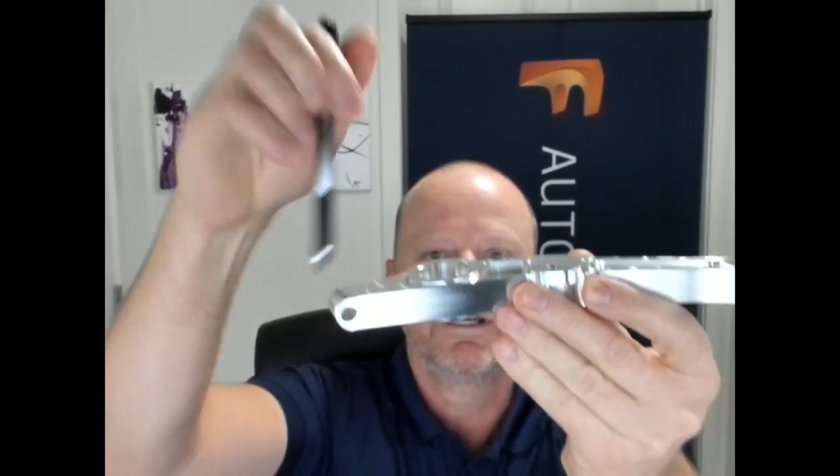So again, like I said, you expose this hole and all of the work on this side is done and this hole is done. So all of this stuff is perfectly in the right spot, very accurate. And then when you flip it, this hole is still there, and all of these features we want to be relative to this.

So what I did is I drew - let me back up a second. So what we can do is in midstream we can come in there, probe it, and carry on and make sure that everything is right. So what we're going to do today, I'm going to show you guys how to do that.

So let me switch screens here. And because I rebooted, I lost whatever files I had open, so let me switch screen. And let me hide that component color toggling there. Okay, so let's turn that on.

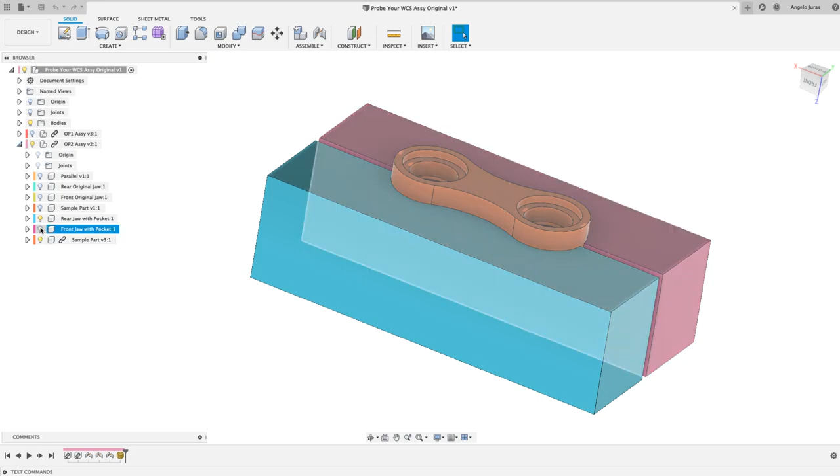So if you remember on the last live stream I did some soft jaws, and this is a similar part. Let me hide some of these jaws here. So this is a perfect scenario where we could use that strategy.

So let's say if you have this feature here and it's a counter bore and it's very accurate, and on the other side you also have that same counter bore. Well, how do you machine that if you were to flip it and guarantee that it's concentric? So this could be like a link, and what if there's a bearing in there or a bushing of some sort?

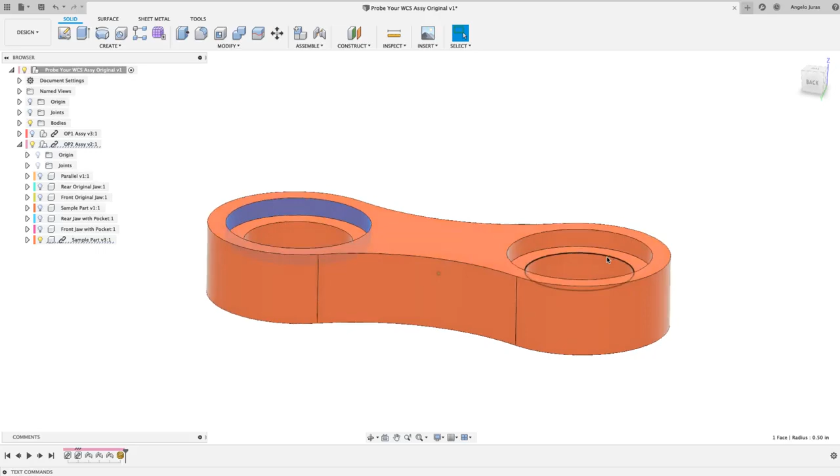So one strategy we use is we can come and machine everything and obviously do the first operation, and then when we flip it over, we would machine off the material off of this face, and it would expose this through hole that was done from the bottom. And then we can probe this feature here, probe this feature, and carry on and make sure that bore is concentric to this bore.

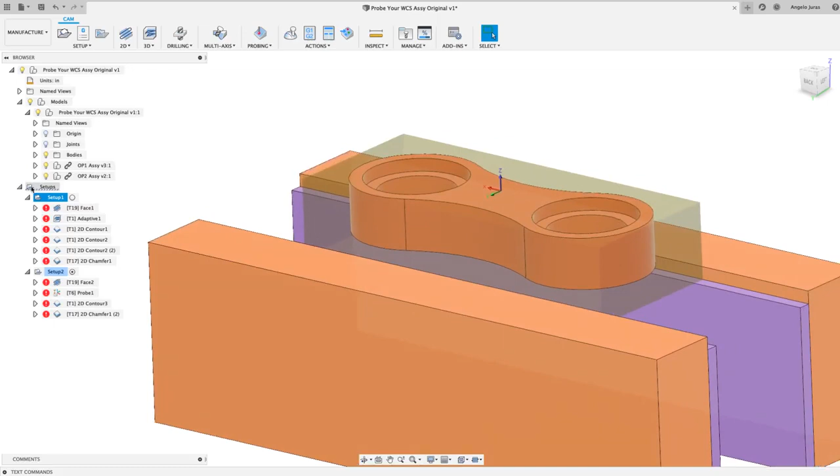So I did, if we come in here to manufacture, I did a little workflow here. And let me come in here and just kind of make things visible. So we've got our operation 1, and we've got our steel jaws - these are some parallels, steel jaws in our vise. And we've got our stock, so there's the stock you can kind of see in that highlighted preview. And then let me generate all of this.

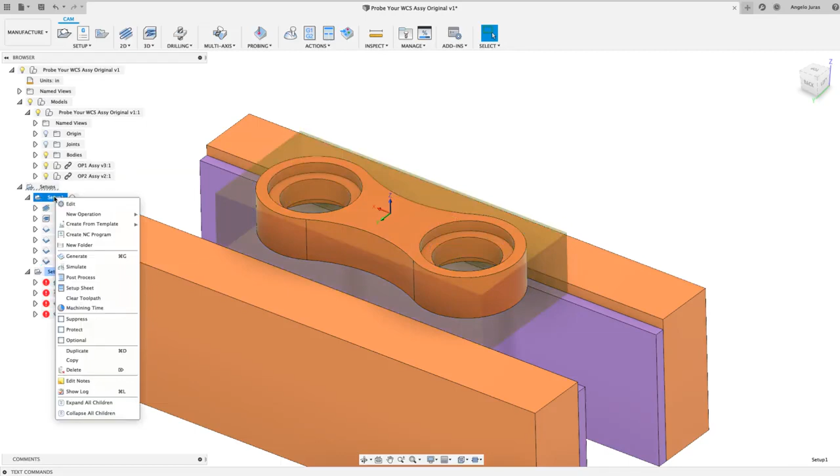We face that, we do some adaptive to clear that material, do a finish contour on the outside, finish contour of that inner bore, and then also these counterbores, and then chamfer to deburr everything. And then what you're left with, we can simulate this now. Let me show the stock, and I'm going to make this just material for now. And on the mode, I like to show tail. Let's simulate that.

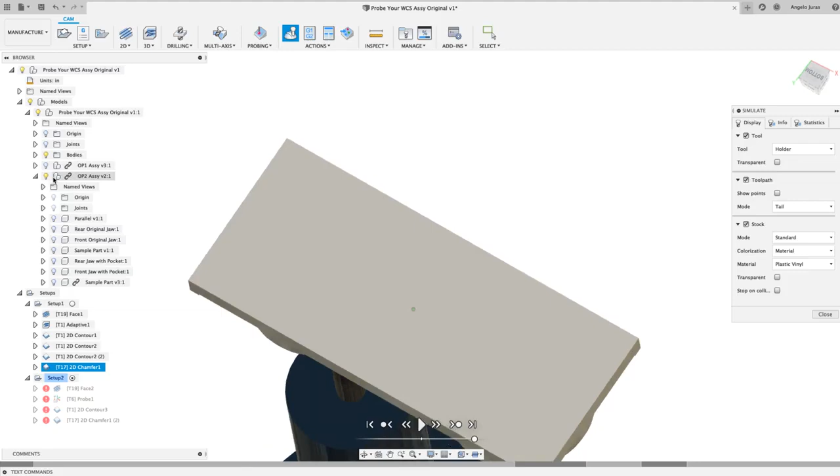We could even hide the part so we can see just the stock. So then there's our part, and then we've got this counterbore there and a through hole. So how do we ensure that when we flip it over, and let me hide this assembly and show these guys here. So when you're holding it this way and you machine this off the top, how do you ensure that those counterbores are going to be in the right spot?

So that's what we're going to do today. I'm going to show you guys one workflow. It is not the only workflow that you can do in Fusion. There's many ways to get from point A to point B, and this is just one of many ways to get there. So we're going to do that right now. I'm going to switch over to the new design.

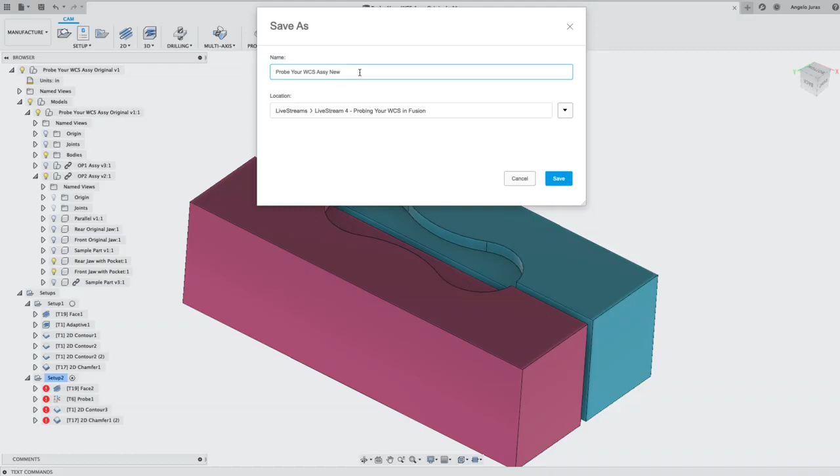So now we've got a brand new part, and what I'm going to do here is delete. So let me clean this up a little bit so we're looking at a clean slate. So I'm going to delete that setup. I'm going to delete this setup. And what we want to show is the first operation and the part. So we're not going to get into how I did all these assemblies. That's going to be in a future live stream. Kind of covered that last week, on the last live stream I did on creating the soft jaws.

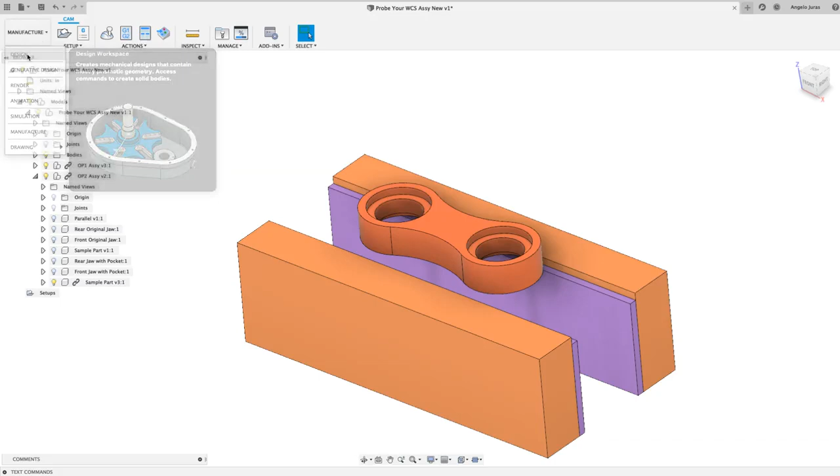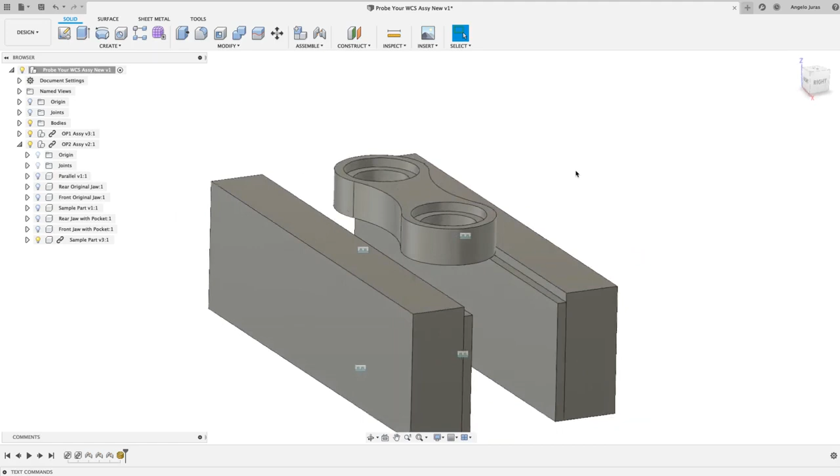So let me go here to design, and of course, because I showed things here and hid things and unhid things, it all depends on if you're in the manufacture workspace or the design workspace. We can turn off this just so you get an idea, but I'm going to leave it on so you guys can distinguish easily what is what. So this is going to be our part, and then these are jaws, and then these are parallels where the stock sits on. And I've got the stock right there. And the stock is transparent. So let's go ahead and start creating some toolpath and show you guys how we did that.

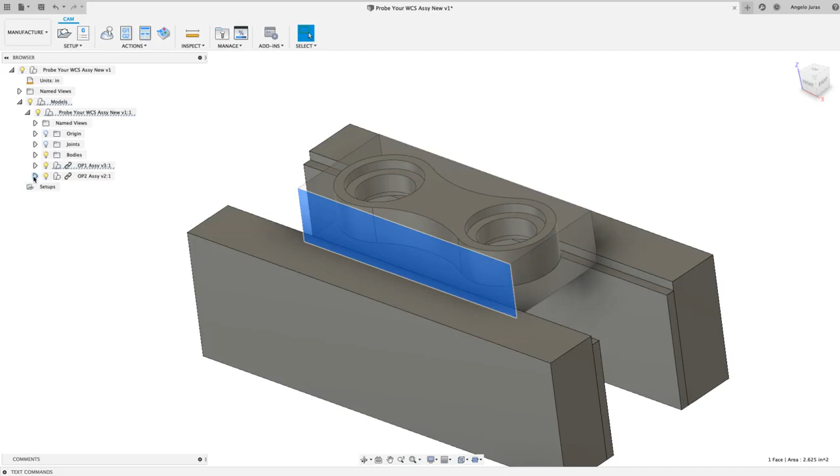All right, so if you remember, we come in here in Fusion in the top left where we have design. We want to come in here under manufacture. And the manufacture workspace is where we do all of our machining. There's also other goodies we can do in there, but I'm just going to do the machining for now. So again, like I said, we've got our jaws and we've got our stock. This is our stock and our part in there. So let's go ahead and create a setup. And in the setup, what we want to do is define our workpiece, define the stock, define the origin.

And as you can see, when I did a setup, Fusion automatically recognized everything in my assembly and threw some stock around there. But one easy way I can get around that is just here, go under model. And model is what are you cutting? What are you machining? So I can come in here and I can press, click, and hold to pick through that stock. And I'm going to pick that. So again, I'm going to X out of that. And we've got all of this here. There's that stock, that rectangular stock. How do I pick through that? You click and you hold. And then as you move and hover your mouse, it's going to start picking up things that were behind the cursor of your mouse. So that's my part that I want to machine. So I'm going to do that and click that.

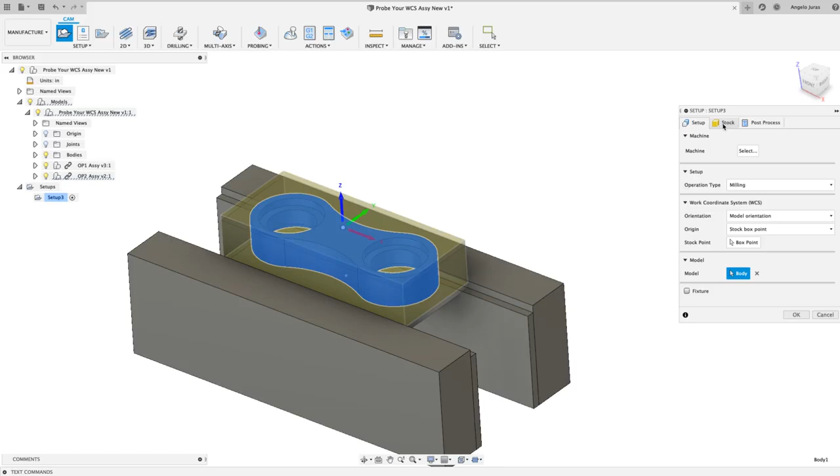The next thing, I'm going to jump over here to the stock. And by default, Fusion's doing a relative size box, which is leaving 40 thousandths of an inch on the sides, 40 thousandths on the top. I'm just going to come into here, and because I modeled my stock, I'm going to go here from solid.

And now I need to select the stock. So where is that? That is my Op1 assembly, and there's my stock. So now you can see Fusion is identifying the stock that we'll be machining away to create this part. Again, if I cancel out of that, I come in here into my browser and I just navigate to the Op1 assembly and I have my stock in there.

And I hit OK. Oh, actually, let me come back here. I want to touch on a few things here. Here, under the origin, this is where you set in your 0. So you can do model box point, or you can do stock box point. And what that does, it projects like a rectangle, and it creates these dots at the end points and at the midpoint of all of these entities.

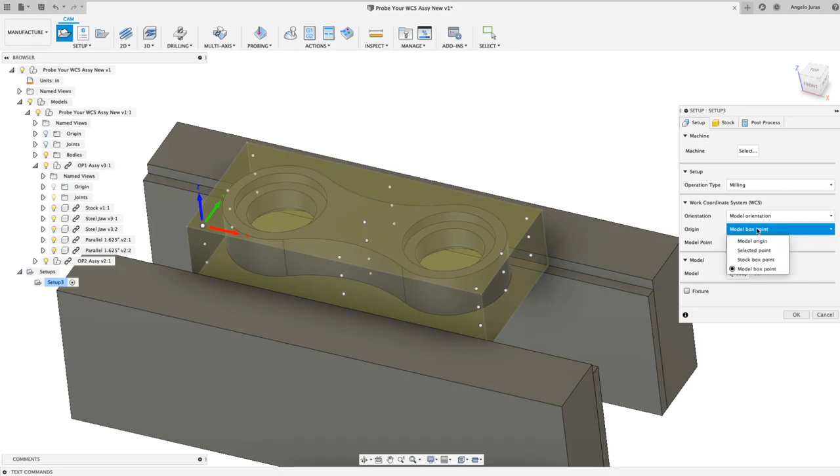So you can say you want your X0, Y0, Z0 here on this corner. You can pick this corner. This is of the stock. And again, like I said, you can also do of the model. And I'm not going to choose model because I am going to pick off the stock. So I'm going to do stock box point, and I'm going to pick the center. And the reason why I'm picking center is I'm going to be able to probe this and pick that stock.

And I'm going to hit Z, the Z face, to come down with my probe here and hit the top of that. And if you guys don't know what a probe is, let me minimize this, and I can drag something into this screen. So earlier I was showing that part that I made last week at Haas. We did a Train the Nation tour, Machine Like a Pro. We made this part. So there's a probe in the machine spindle, and these are the parts.

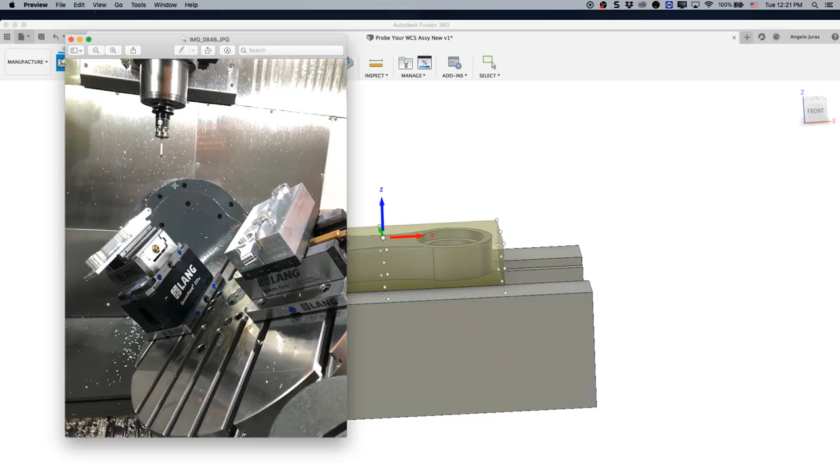This is a 5-axis machine. The table is obviously tilted and rotated. But that is a probe, and that's a Ruby stylus. And this stylus is very similar to CMM. So this stylus has radial deflection and axial deflection. So the machine spindle will come down and make contact with the part and take some measurements, and you can set your work offset. You can measure the bore diameter. You can measure feature to feature. There's all kinds of cool things you can do with the probe. So that's what it is. That's a spindle probe.

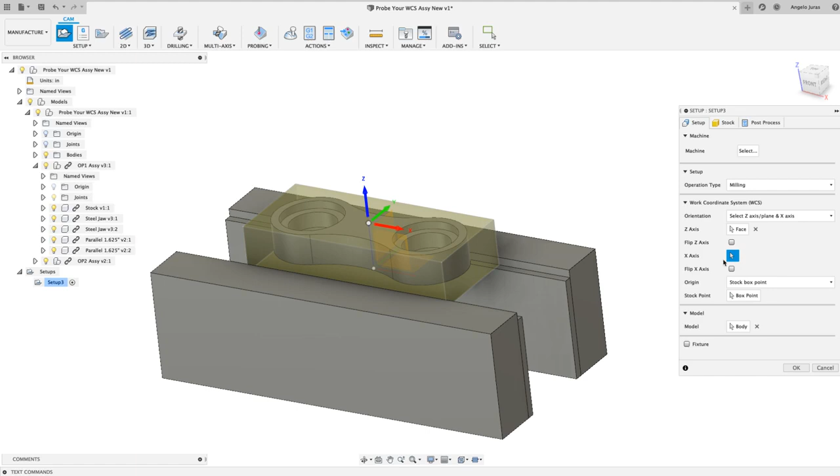All right, coming back over here. So just going back through here, making sure everything is set right. On my orientation, I like to do Z and X depending on what I'm doing. And in this case, that's exactly what I'm going to do. So I'm going to set Z normal to that. It's already there, but I'm going to show you how I do that. So Z is this face. And then once I select that face, Fusion jumps over to X and is requesting some information. What is the x-axis normal to? So I'm going to say that face. And nothing really changed because the model was already in the right orientation.

But if it wasn't, like you see this view cube over here where the Z and X are, sometimes when you have a large assembly or if the model was imported or brought in a different orientation. So this is where you set your orientation of your WCS, work coordinate system. So everything looks good here, guys. I got that set. I've got my body, and again, I've got my stock, post-process. I'm just going to tell it program number 1, and I'll just do op1 live stream.

And we've got another feature up here called NC program. We're not going to have time to get into that, so I'm just going to keep it simple here. And like I've talked about in previous live streams, we've got your WCS offset. Your machine can have different offsets, so you can do 1, 2, 3. So 1 would be G54, 0 is also G54, 2 would be G55, and so on. Okay, so that all looks good. I'm going to hit OK.

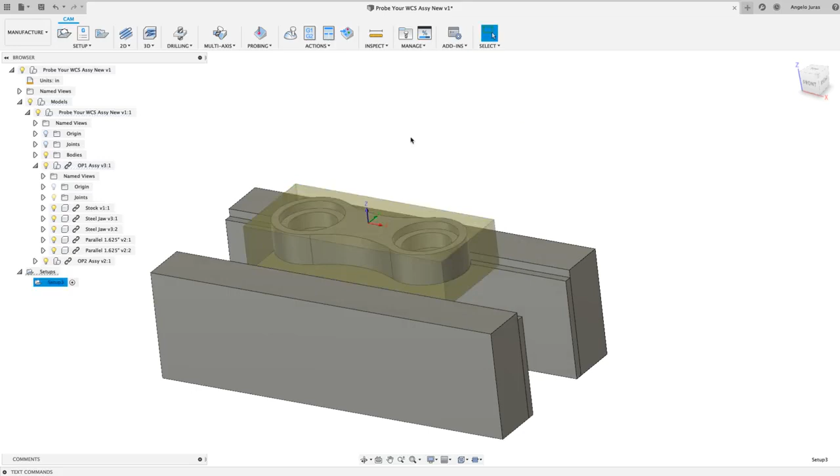And now we've defined, let me close some of this just to clean up my screen a bit. So now what we've done, we've defined our stock, the origin of the stock, and we've defined our model. One thing I could have done in this setup is defined the jaws. Actually, I'm going to do that. Here under fixture, I can just click this, this, and that parallel. So when I do the simulation, it's going to show that in the simulation. It'll give you a nice representation of what we're doing. So I'll hit OK.

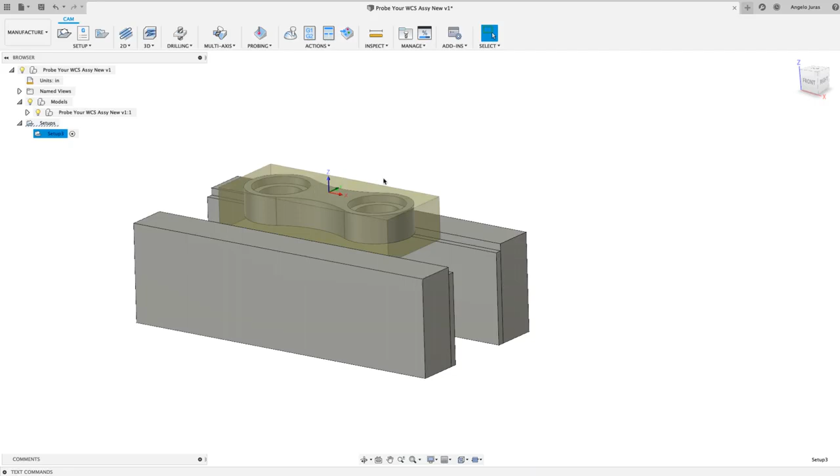Very first thing I want to do is I want to face the top of the stock. So we've got our 2D toolpaths here. I'm going to select face. Very first thing we want to do, we've got all these tabs over here. We need to select the tool. What tool are we going to face with? So I can come down here. I've got all these sample libraries. I'm going to come down to this one, inch aluminum, and I can sort by type. I'm going to look for face mill and hit OK.

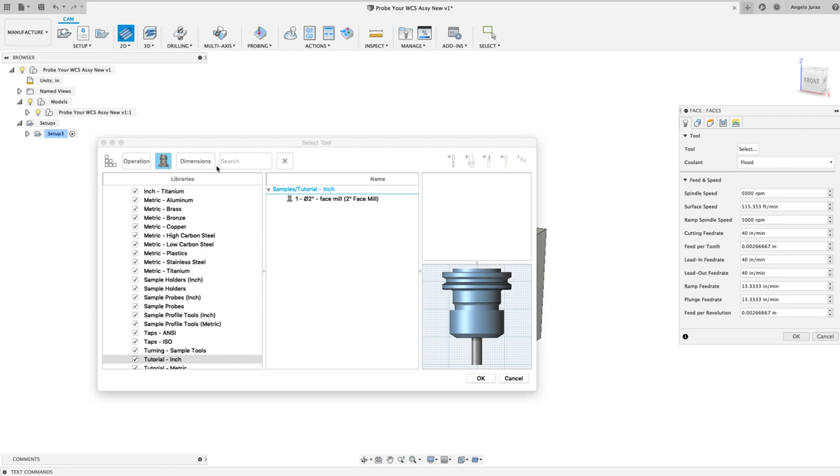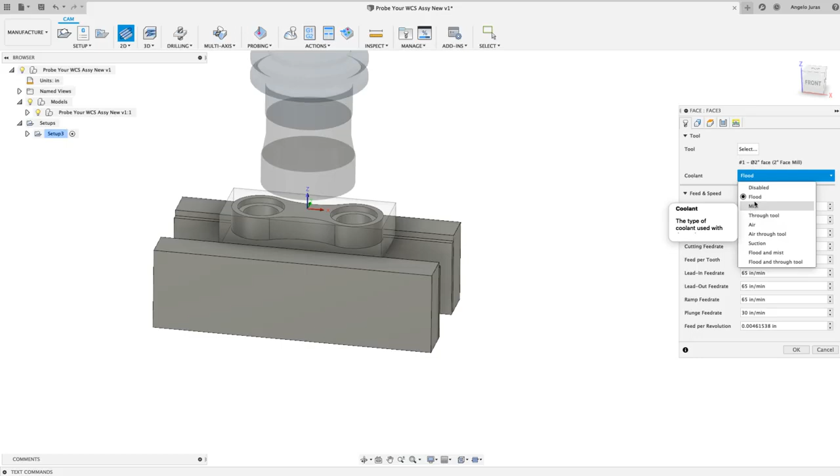And looks like I don't have anything in there, but I know I have one down in here. And as soon as I click that, I'm filtering by the face mill. And yes, I do have a 2-inch face mill. There's a preview of my tool, and I'm going to hit OK. So Fusion brings in the preview of the tool. Speeds and feeds are brought in from the tool. You can adjust those here. If you want to adjust your coolant, you've got all these options here on the first tab under Tool.

The next tab is Geometry, like what are you cutting? And I didn't select anything, but Fusion automatically detected this yellow rectangle, and that is the stock that we defined in our setup over here. So Fusion's intelligent. It already knows where the stock is, and in the setup, if you remember, we defined that model body. So I don't really have to do anything there, and by default, everything is correct here also.

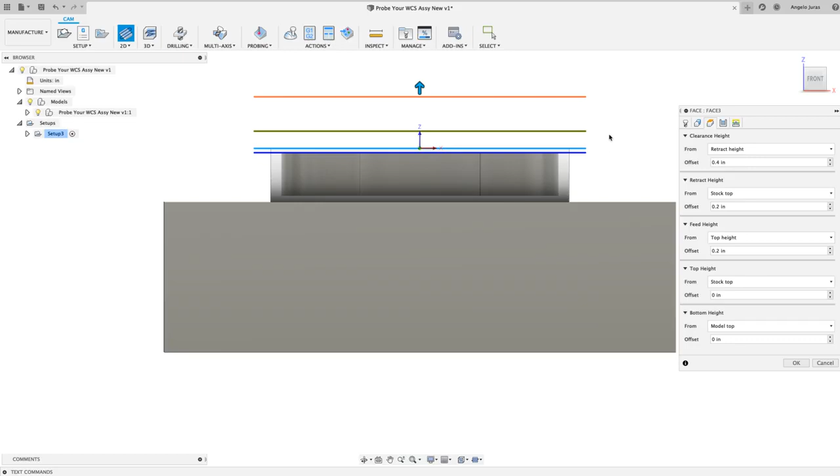If I look at it from the front, it says the bottom height is the model top, which is that dark blue line, the top of the model. The top height is the stock top, which is that light blue color. And then the retract and clearance, that's where the tool is rapiding to and positioning, and if it's moving around, where it's retracting to in Z. So all you really need to do is select the facing operation, select your tool, and hit OK. So Fusion's going to come in and machine that face.

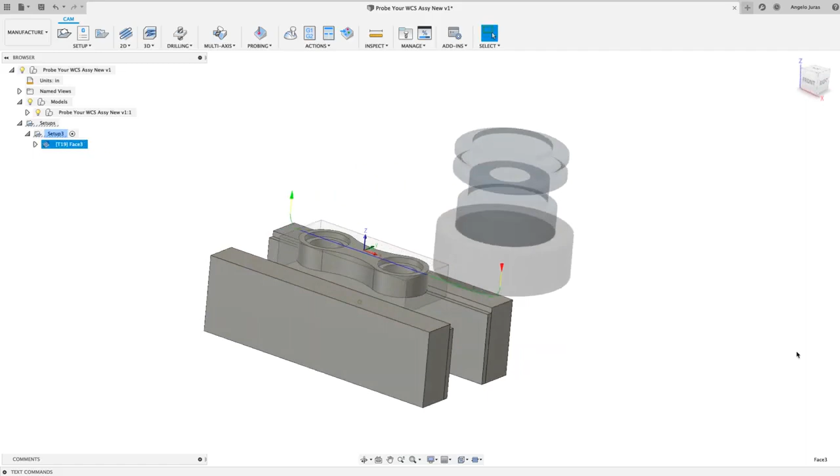I'm not crazy about how that looked there, so let's do this. Let's select a different tool. I'm gonna come into my tool. I've got a 3-inch face mill. Let's do this one and watch what it does now. It's just gonna come in right down the center. I like that. That looks good. And we're only taking 50 thousandths off the top, so we can do that in one shot.

If you want to do that in multiple passes, you would right-click your operation, and under passes, you would do multiple depths. So this is your maximum step down. I can say take 100 thousandths of an inch maximum, and then for the finishing, take 0.005. I can even slow down the feed rate to something like 50 inches per minute, and hit OK. So if I zoom in, you could see now it's taken 2 passes. So there's that first pass, 5 thousandths above, and then the second pass.

All right, let me take a look here at the comments, see if there's any questions or anything. Looks like Aaron's covering that well. Maybe we could talk about G-code sometime. I'd love to talk about G-code sometime, Ron. And Ice Creams 62. Hey, whoever won the bottle openers, did you guys receive those in the mail? All right. They did, yes. Aaron says they did. Awesome. Cool, guys.

All right. And one thing on that bottle opener, let me switch over here. I thought I had one here. It's very narrow. So when you're trying to open the lip, it's peeling it, whereas a traditional bottle opener is a lot wider, so it grabs around a larger radius. So when it lifts up, it does it in one shot. Ours was narrow because of the spark plug, so you have to get it in a couple of bites, but it works very well. We've tried it.

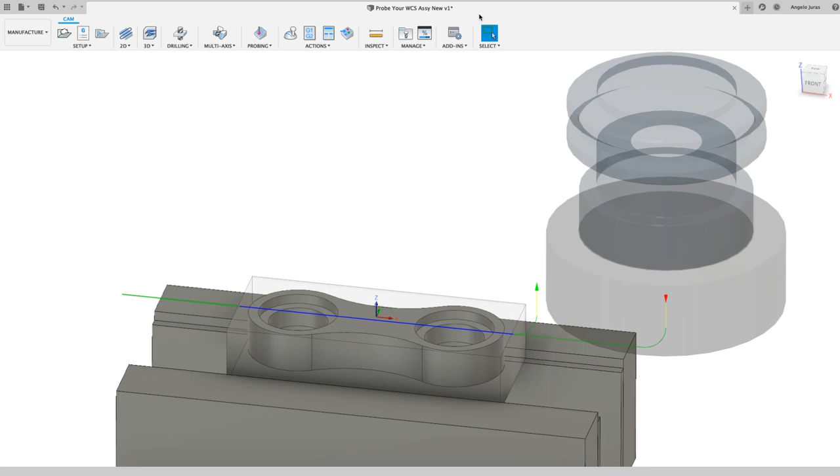All right, so moving right along, we've got that face. We need to machine around the outside and rough those bores out. A few ways to do that. I'm just going to come in here under 3D, Adaptive Clearing. I'm going to select a tool, and I have this 3/8 of an inch flat end mill, and I'm going to hit OK here. I'm going to select that, and then we don't need rest machining turned on.

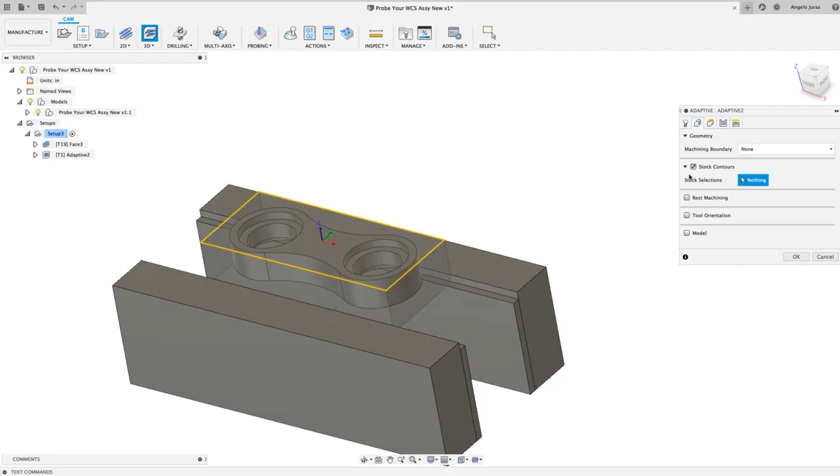Stock contours though, remember what I just said earlier for the facing? Fusion recognizes where the stock is, so if you had larger stock, it would put that yellow rectangle around a lot larger boundary, and it would know where the stock boundary is. Under heights, the default here is model bottom. I'm going to do something different. I'm going to say take the tool down to the top of that jaw, but raise it up. Let's do 50 thousandths above that.

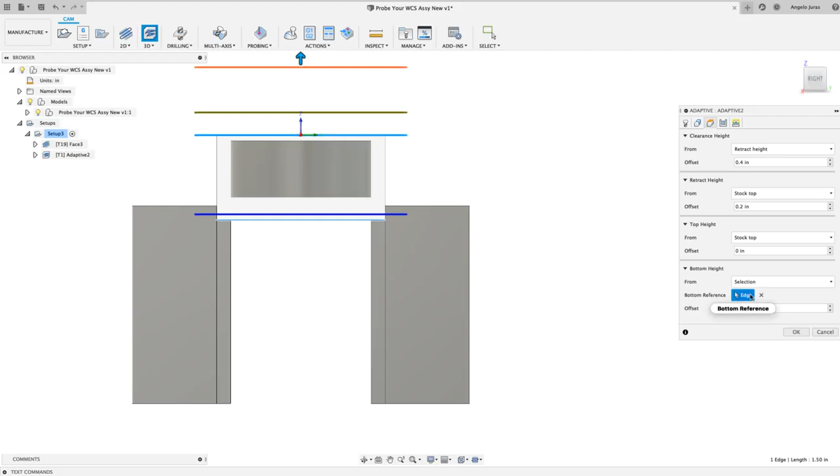Let me come here and let's see. Will that work? Yeah, let me rotate around to this side view. So this is the jaw, and these are the parallels. This is the stock. Oh, I still have this selected, so every time I'm clicking, it's selecting things. So let's cancel that out, and I want to make sure that I select that face, view it from this side, and my tool will go to this dark blue line, so it will be 50 thousandths above the jaw. So my tool will go right to there. That looks good. I like that.

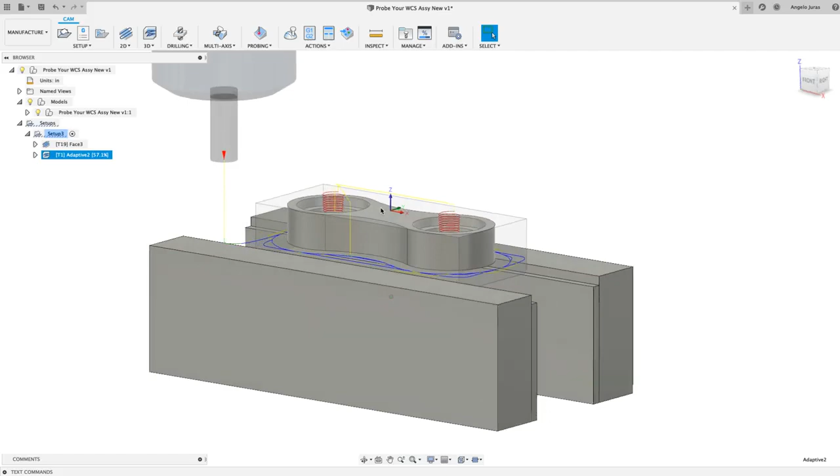And then stock to leave, we want to turn that on. I want to leave 20 thousandths on all the walls radially, and 20 thousandths on all the floors axially. I'll OK that. And Fusion will now rough out the outside and rough the inside, because I told it stock to leave. So that looks good so far. Let me do a quick simulation. I'm going to right click here, go to simulate, just so you guys can see where we're at.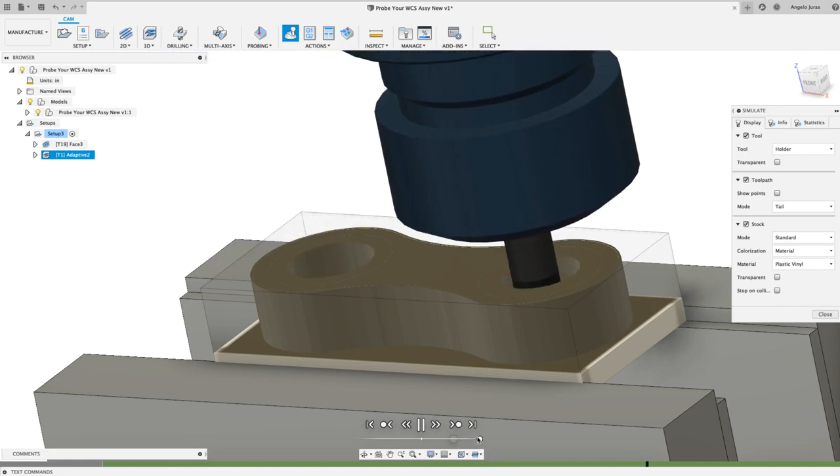And there's that finish pass, and then roughing around the outside. That looks good. And there it's entering the hole. Speed this up a little bit more. All right. Left a little bit more material there than I was hoping, but I can make some adjustments in the passes tab. I can come to that in a moment.

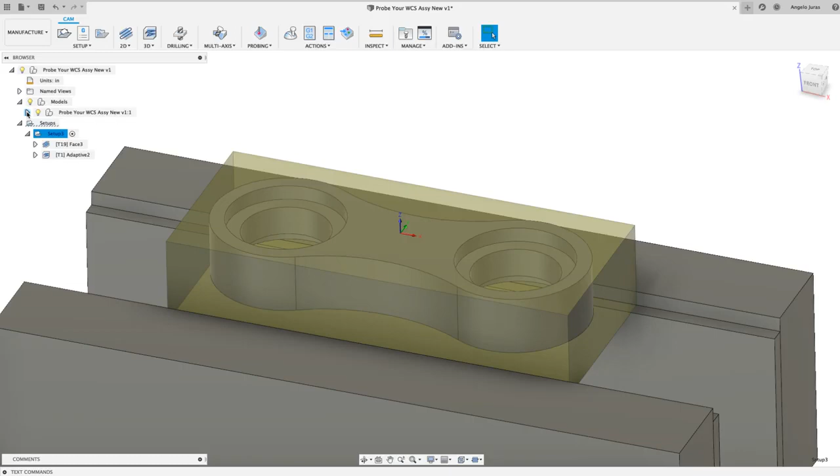What I'm going to do next, guys, we want to finish around the outside of that. Let me come into here under 2D contour. And I'm just going to select this edge. And under the heights, remember what we did previously? By default, Fusion is going to the selected contour, which is that bottom edge there. I'm going to go to selection again and say go to the top of that jaw, but stay 50 thousandths above that. And there we got a toolpath. And we cut around the outside. That looks good.

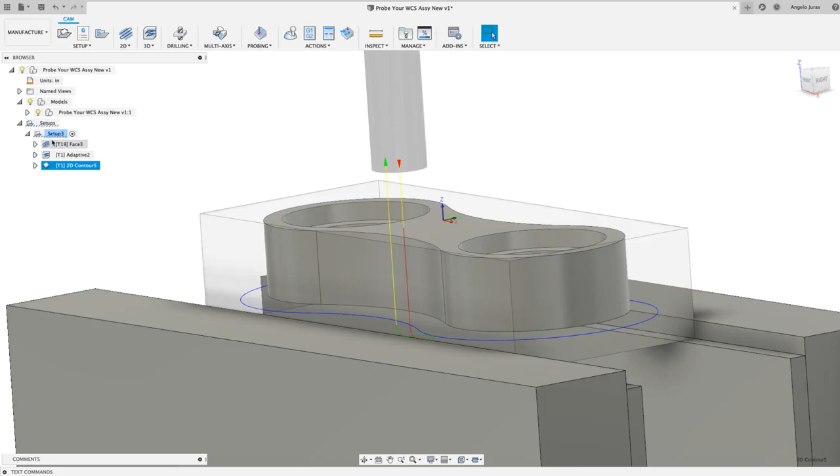Let me take a quick look at the comments. "How can I set up a manual work position for the stock? I want to nail the stock to an MDF board and use a work coordinate 0, 0 on the MDF position." Duke Dynamics, are you talking about here? This WCS? Oh, looks like Aaron answered it already. "Are you modeling all this in Fusion?" Yeah, looks like Aaron got it. Okay. I'll stay on track, guys.

Cancel that. So now I need to finish this inner bore. Let me turn that stock off, just so it's not there when I click and hover over. So now we want to finish this inner bore and this wall, and we'll also finish that floor. And remember I said on the adaptive it left a little much on the fine step down. So I can do flat area detection, and let's hit OK.

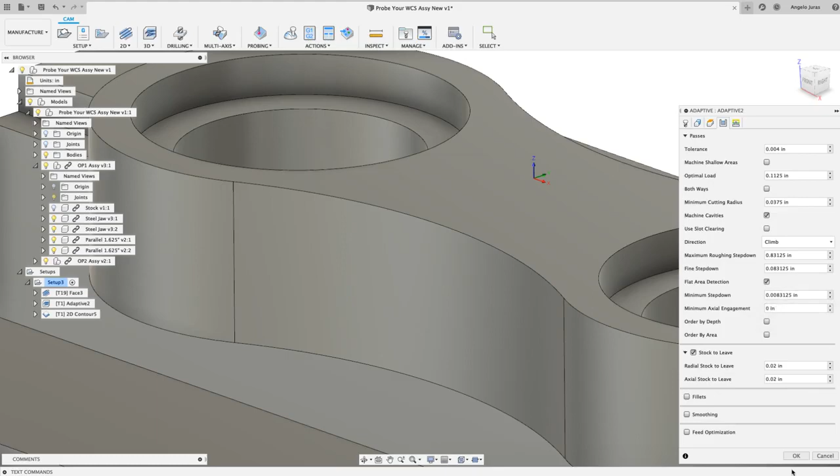And so yeah, oh, we're machining over. Actually, I don't want to do that, guys, because we already faced it. So we'll turn that guy, and then the fine step down, let's do something like this. 30 thousandths, and that's actually more like a step up. And that should get us a little closer to that bottom face.

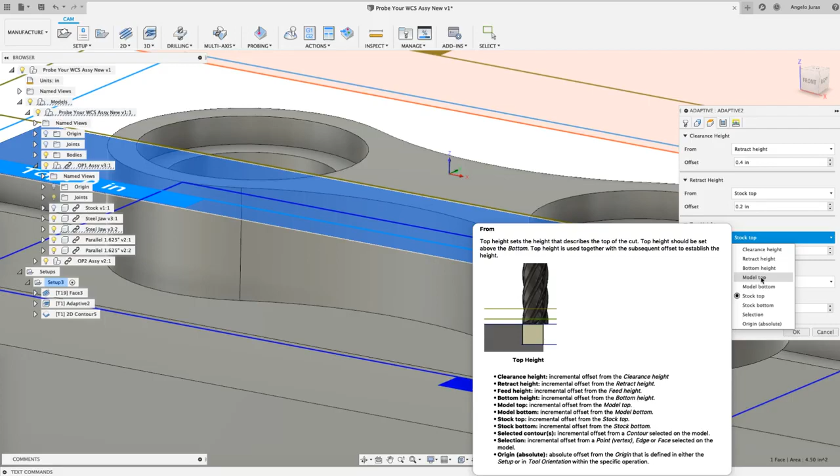And over here, one thing here, stock top. I need to change that to model top. That was the default behavior, going to stock top. I want to go to model top, and it's already been machined. It's already been faced. So Fusion was looking at the stock top, and there was 50 thousandths of material to remove. That's why it was doing that. So now I changed that to model top with an offset of 0. Now we won't be wasting time cutting that top face. There we go.

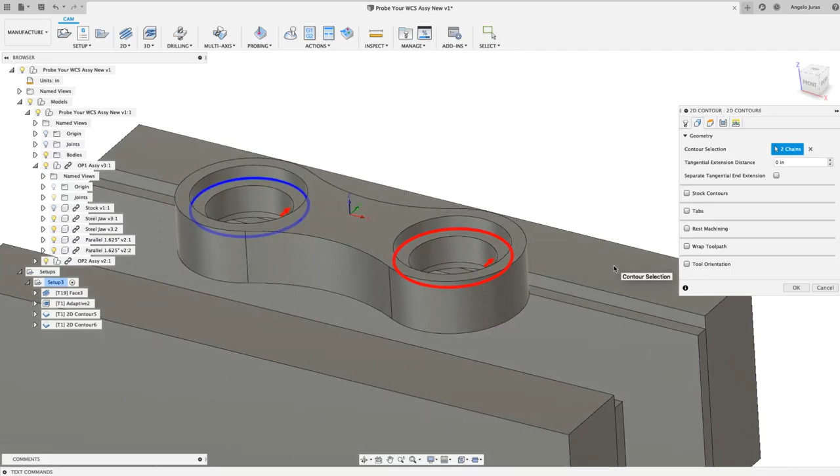Okay, so now we faced it, we roughed the outside, and we do a contour finish on the outside. Now we want to finish these inner bores. I can use that same 2D contour operation. I'll come into here, 2D contour. I'll hit this one, and this one. We'll hit those bores. Actually, I'm going to change the order of that. I want to hit this bore on the inside and this bore on the inside. I'm going to do that first.

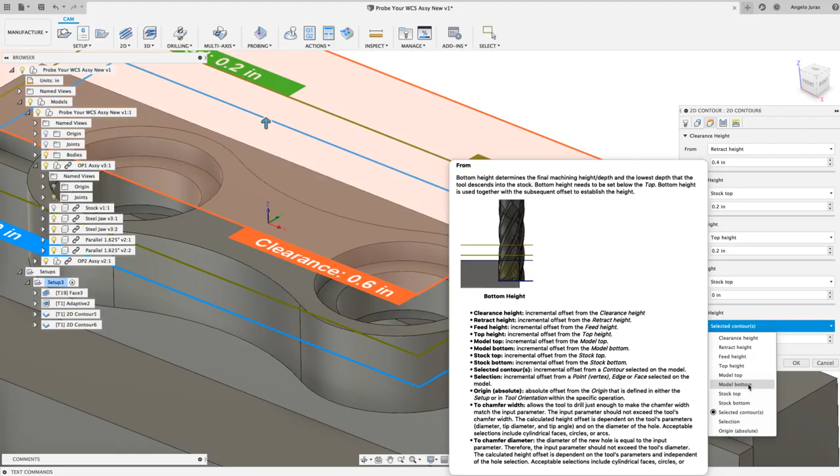And on the heights tab, instead of going to the selected contour, which I selected that bottom edge, I'm going to go to the model bottom and go beyond the bottom by 30 thousandths. So now when I look at this view here, it's going to go to that dark blue line. If I were to go to selected contour, the dark blue line is up inside here, right there. But I don't want it. I want it to go to the model bottom so that when I reach from the other side with my probe, I can hit that. All right, so I'm going to go model bottom.

I'm going to verify stock to leave is off. There's some things I can turn on here. I can do wear compensation. That's for cutter compensation to determine if there's any wear on your tool, so you can adjust the size of that bore properly. So you can turn that on. I'm going to hit OK. And now we're machining that inner bore there, this wall, and this wall.

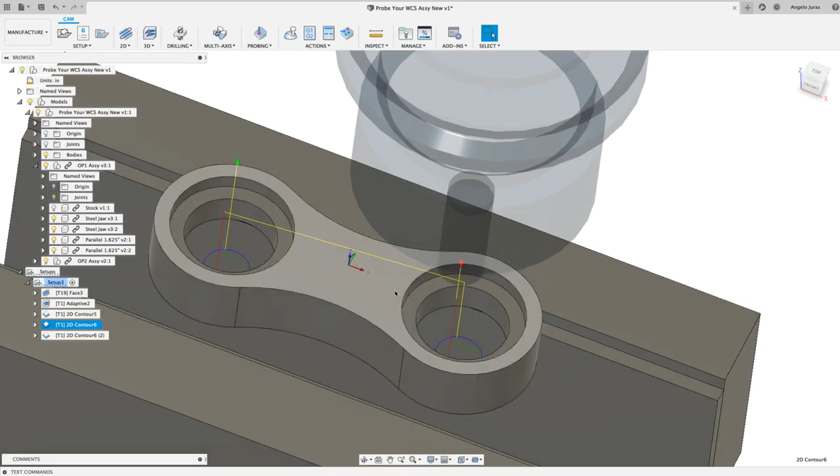So next I want to hit this wall and this floor. One thing I can do, I could duplicate that. And now I got an exact duplicate of that prior one, and I can edit. And here under geometry, I will reselect the chains to here and here. And on the heights, if you remember previously, oops, clicked wrong, I was going to the model bottom. Now I do want to go to selected contour with an offset of 0. So I want to go with my tool to that face, to that depth, cutting that wall.

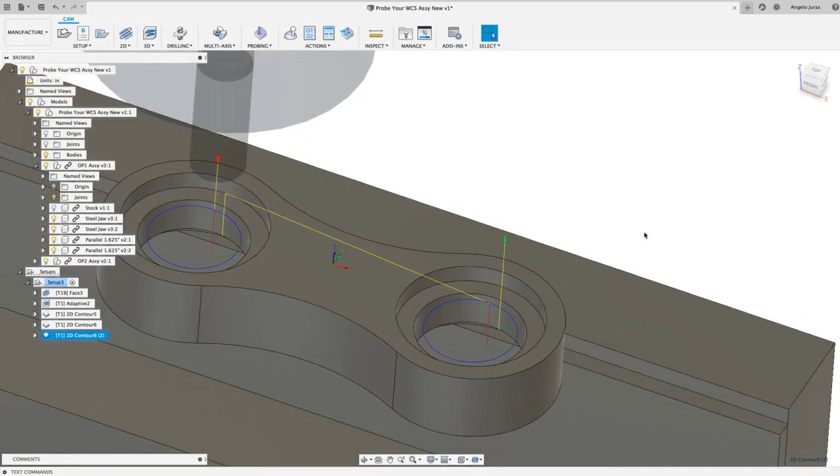A couple other things I'm going to do. I'm going to remove on the linking tab the vertical lead-in radius and hit OK. All right, so now the tool is going to plunge here, machine around that, lift up, retract, come over and machine that. So that looks good so far. Let's do a quick simulation. I'll right click here.

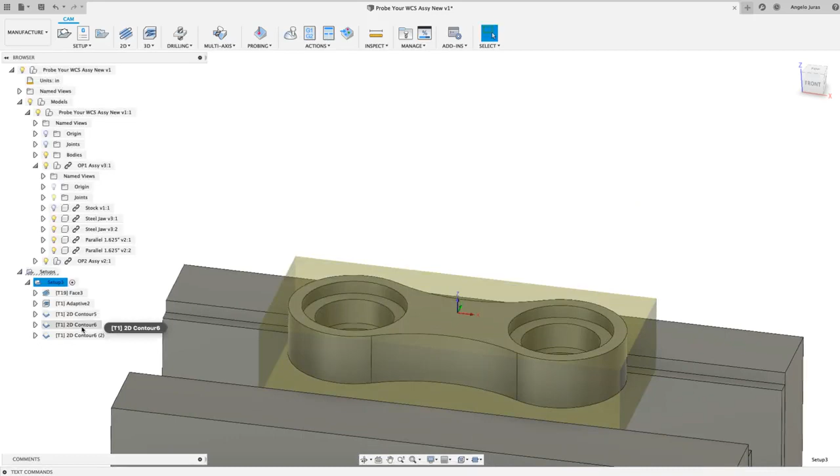So as this is cutting, I see Ron commented the heights is one of the things Ron has trouble with. Okay. So the heights, let me go to that really quick, Ron. I'll talk about that for a moment. So when you're in the heights tab, if I right click edit and I come over here to the heights, what I like to think about, let me view it from the side. I start here on the bottom and I work my way up.

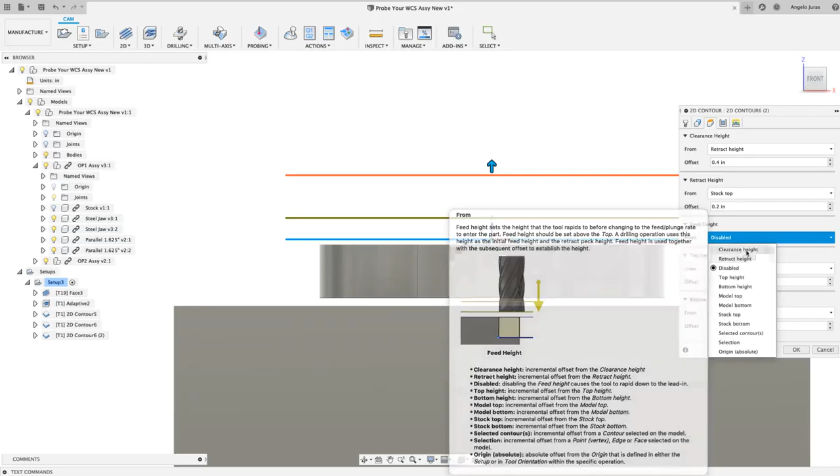So the bottom height is a selected contour, which we selected in here. You can't see it because it's in the part. And then the top height is this light blue line. And you see here where it says top height, where my cursor is, it's referencing this. So it's an incremental distance from here to there. So you can see if I change this to 0.1, the lines move. And then this feed height here, you can even disable that, but by default it's on. So let's do top height.

So if you ever forget the order of the way these need to be set, this references that, references this feed height. So you can do feed height and then retract height. So this retract height is looking at this value. This feed height is looking at this one. This top height is looking at this. And then this bottom is actually where my tool is going.

Hopefully that explains it. Ron, there's many ways to do things, and I don't want to run out of time, but that's basically what I do. I start at the bottom and work my way up. The top refers to the top height. The retract height is from the feed height. You can see with each one there's an incremental offset, so you can even make these all zero, so it's just retracting to there. Hope that helps, Ron.

Okay, so now we've got our part basically machined. Now we need to deburr some edges so it's not sharp.

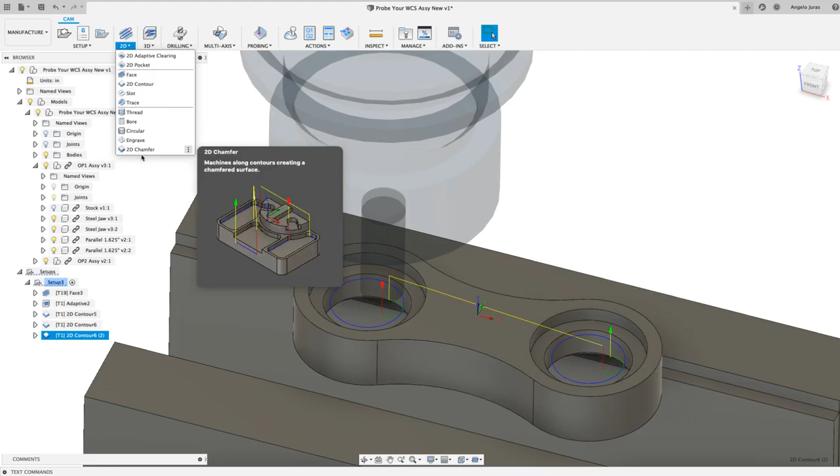We're going to come in here under 2D, I'll do 2D chamfer, and I'm going to select a tool. I had earlier what I was using, a 1/4-inch chamfer mill. I'll hit OK, got my tool selected. I'm not going to worry about speeds and feeds, that's for another live stream.

Geometry, what am I cutting? So I can click this one, this one. I like to do things kind of like this. So I've got those 5 edges chained and selected.

On the heights, I'm not going to worry, I'll leave it all default. But under passes, here we need to define, if I hover my mouse, what's the width of the chamfer I'm cutting. On our model, we did not model the chamfer, it's a sharp edge. But I can say I want a nice small, let's do 15 thousandths of an inch chamfer break, and my tip offset, if I hover my mouse, that is how far the tool is going to go past the selected edge, and I'll give it something like 80 thousandths of an inch.

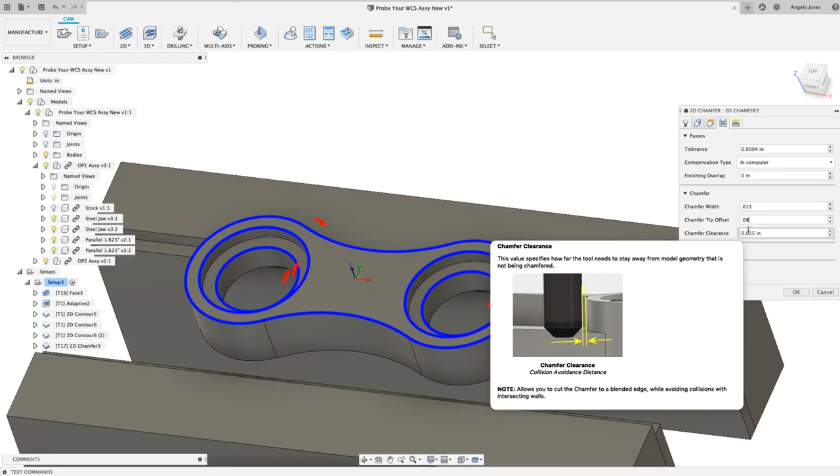And then chamfer clearance, that's for the wall of the shank or shaft of the tool to stay away from vertical walls, for an instance like an open pocket. But we don't have that in this case. We do have this counterbore hole, but I'm not worried about collision because I'm controlling it. I'm telling the tool to go deeper, which will bring the outer edge of the tool away from the wall. You'll see what I'm talking about. And linking, I'm not going to worry about. I'll just hit OK.

So we've got all those edges deburred. That looks good. Let me right click here and simulate, see what the part looks like, and I'll turn off the part itself, and that is here. Let's play that.

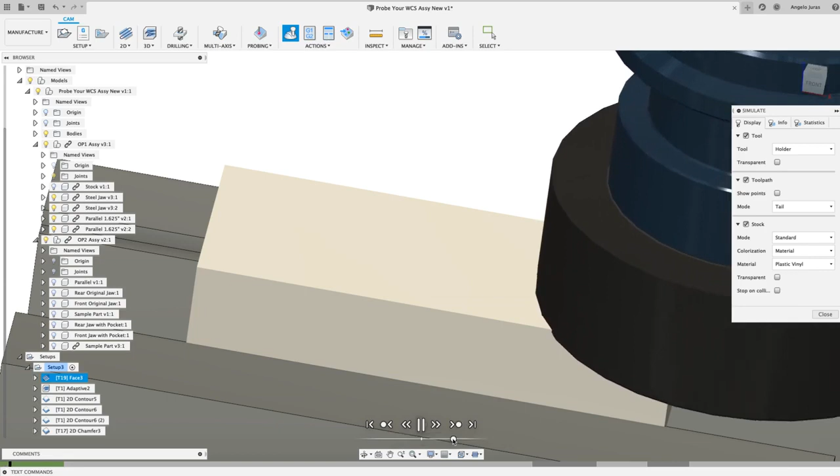So we haven't probed yet, but I just had an idea, and one thing I'm going to show you guys.

That looks good, so you can see we've got a nice chamfered edge. The part is actually nice and smooth. That's just the graphic representation, but we do have a nice chamfer there.

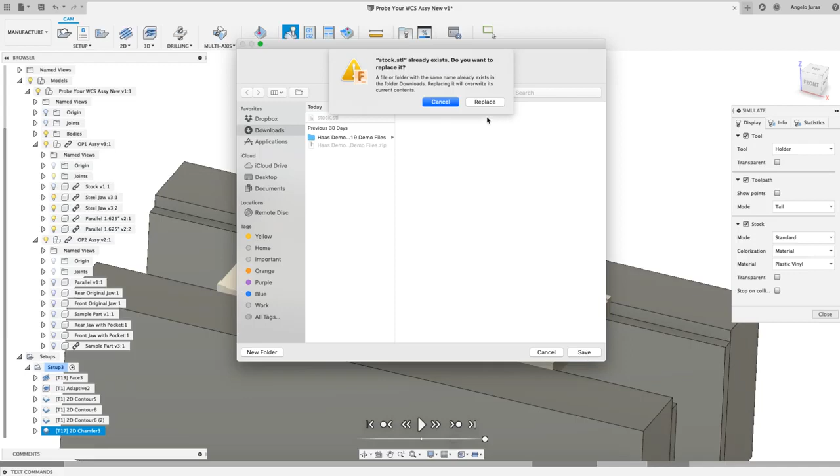So one thing we can do from here to carry the stock over to the next operation, we can right click and say stock, and come over here and say save stock. What that does, it will save it on your computer. I'm just going to save it under my downloads. There already is one there because I was doing this earlier, I saved my stock, so I'm going to replace it with this current one. And that's what we're going to need on the second op.

So let me close this. And one thing, guys, we can do, let me minimize, do some housekeeping here, clean that up. So this will be op 1.

One thing we can do here, guys, is when you put your stock in, and if you don't have a stop, and you just eyeball that in, or maybe you draw a line with a Sharpie marker, or you scribe a line, you could eyeball your part. And in Fusion, you can tell it now to probe that to find that center. I'll show you how to do that here under Setup.

You can go under Probe. We've got all these other new strategies here. We'll cover that in another live stream. I'll also be posting videos on our channel on how to do that.

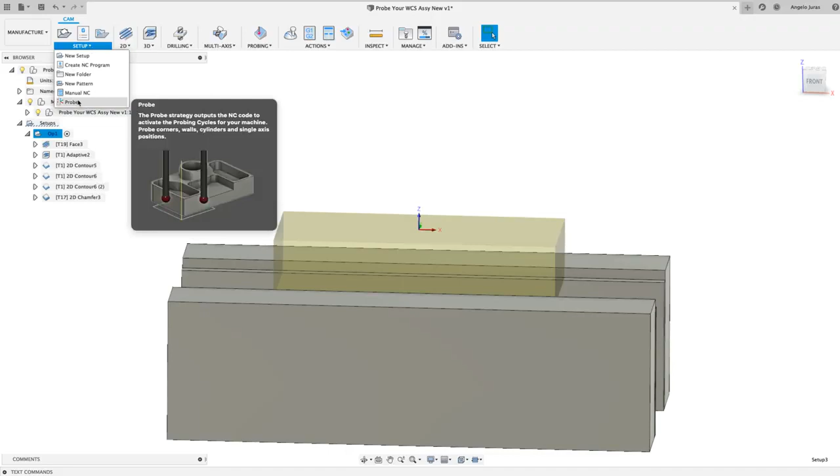Probe. We will select our tool, and I've got my probe here, it's a 6mm ruby stylus. I'll hit OK. And under geometry, you can select off the model or off the stock.

So let me come back here and let me make visible, let me make some things visible here for, where is my part? So there's my stock.

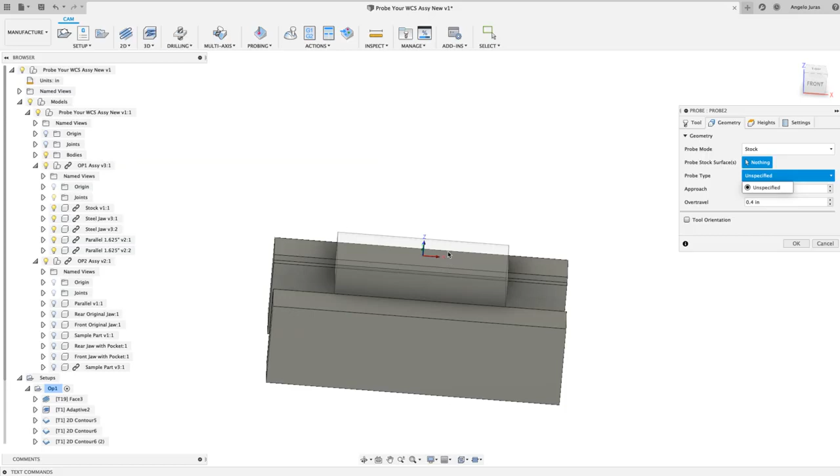So let me do a feed rate here of 50. Stock. Probe type. Why is it not? Why am I having an issue here? Huh, there it is. I guess I was not clicking in the right spot.

Sometimes there's a delay when we've got these live streams. So when I click that top face, Fusion automatically determined that that's a rectangle. And I can click on this face here and just that face. For this example, I'll just do that. I could also hit the Z. Look at that, so I'll just hit that top center and set my Z.

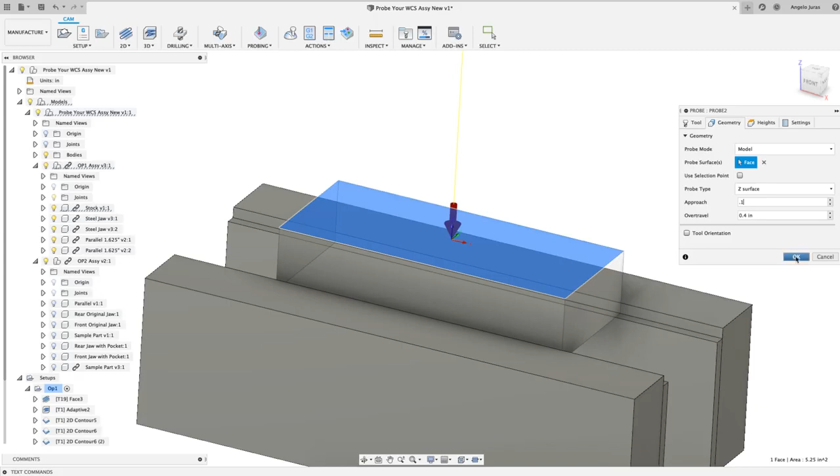I can give it a nice round number here. Hit OK. And then I could drag this down here. I can drag that first in my setup. The first thing it's going to do is probe that. And then I'm going to check this out.

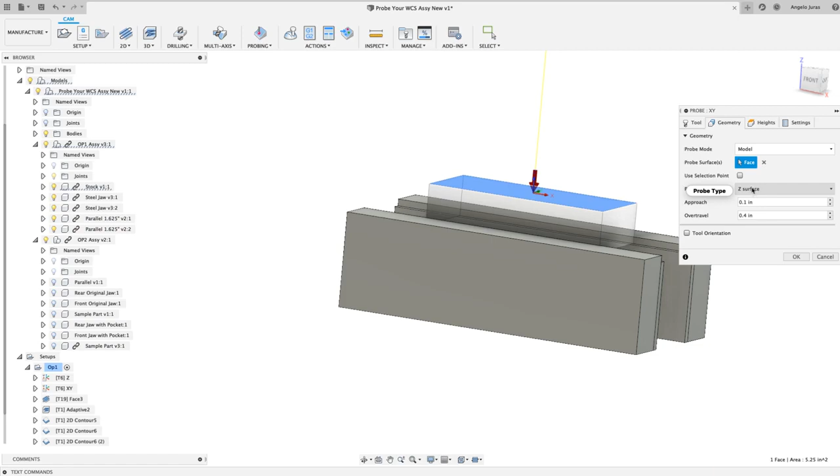I'm just going to duplicate this, and we'll call this Z. And here, I'm going to call this XY, and this is where I'm going to probe my XY. So I'll right-click and edit. Under geometry, instead of Z surface, I'm going to do rectangular boss.

And because I have model selected here, because I do have the stock modeled. And if I do stock here, that's when Fusion creates your stock automatically. But because my stock is modeled, I was able to select the model. That's why it says model. So you could come off the actual physical part or the modeled stock that you created, and that was here in my tree, or in my browser, I should say.

Heights, I'm just going to use the default. It's going from the top surface down 118 thou, 3 millimeters. And settings, you can come into here if you wanted to override the driving work coordinate system. So I'm using G54. If you wanted to change it and use G55, after you probe, you would click this here. I'm just going to leave it how it is and hit OK.

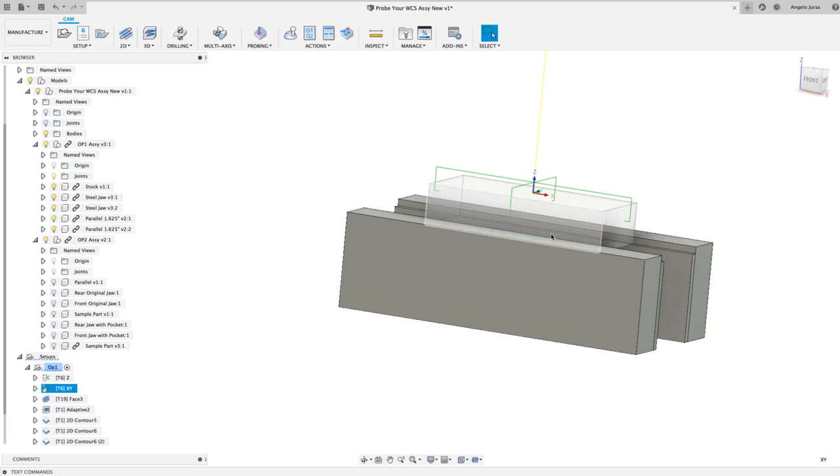All right, so now we're probing our Z and probing our XY. So if I just drop this part in here and I have it eyeballed and it's off a millimeter or 1/8 of an inch or whatnot, I can adjust it with the probe. But I see the approach is a little close. Let's do this, we can give it a greater distance.

You see this? So the tool is coming way out here in this green line. And you can change that right here. You can even come way out, like 1 inch away.

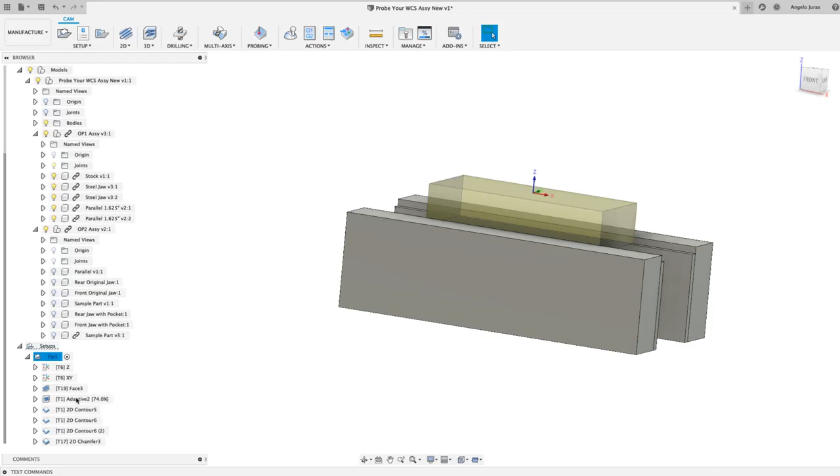So now let me right click and I'm going to simulate. And you'll be able to see, let me generate. Yes. Let's let that adaptive finish generating. Now I'm going to right click and simulate.

And now you'll see the probe will come down and hit the Z, and you'll probe the part here and set your G54. And you'll see there's a collision, and that's because the tool is actually colliding with the material. So that's what these collisions are - the probe is touching the stock. So don't worry about that, that's normal behavior.

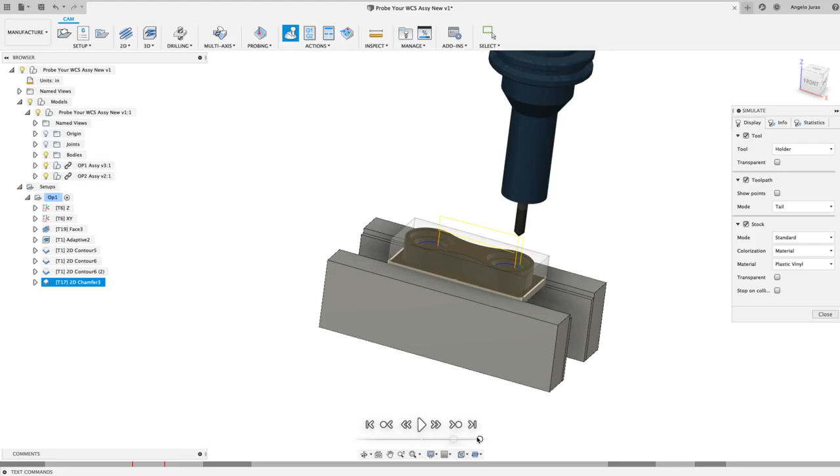Okay, so we got that operation done. Now we want to work on operation 2 when we flip it over. And that's the main thing that we wanted to talk about here in today's live stream.

So let's turn these jaws on, and I'm going to hide - don't need anything from there. Turn my part on. Okay, but what I need to do, I need to bring in my stock.

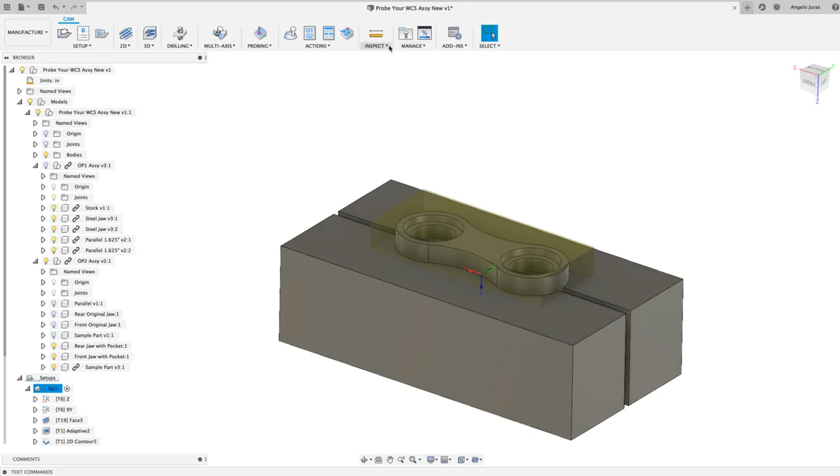Remember we made our stock from the previous op? So let's bring that in. So you can go into here. It's not up there, I need to be in the design workspace. There it is. So under insert, you can insert mesh.

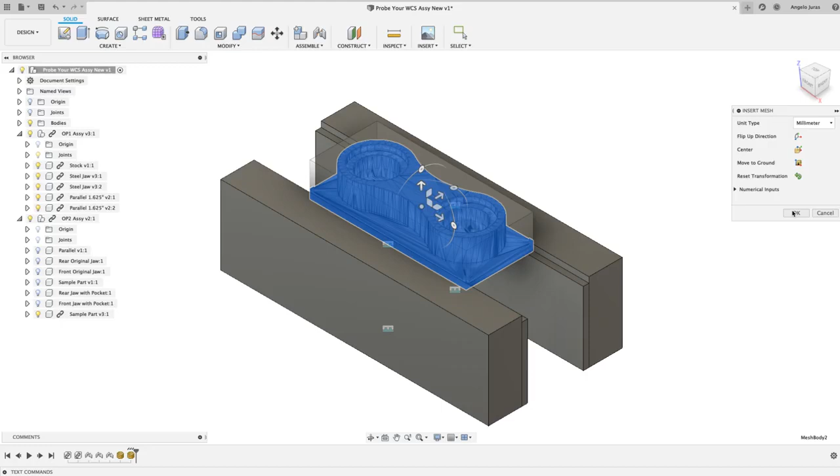And if we look in my downloads where I just saved that, there's my stock. I'm going to open that, and it will bring it in. We need to verify and make sure that's in millimeters. I'll have to talk to the Fusion guys and see why that is, I don't know the answer to that. Maybe Aaron or Brad might have an answer to that. But make sure that you bring it into millimeter so it's the right size and not huge. Okay, I'll hit OK, and that's going to be dropped in right here.

So there's our stock, and there it is. This was from the previous one, I can delete that, when I was going through this earlier. Okay, so now we've got our stock.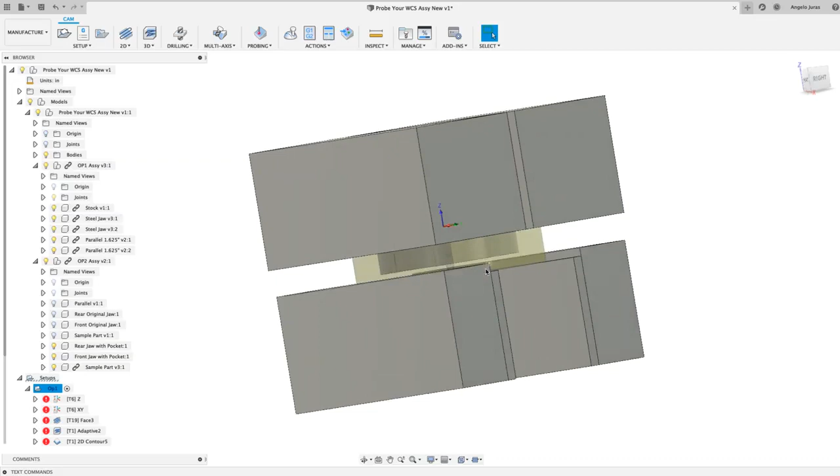Let me come into here under manufacture, so our operation 2. You're probably wondering why this is now upside down. When we define and draw our assembly, we want to keep the part and the stock exactly where it lives in space. Our Z for op 1 will be in one orientation, and the Z for op 2 will be in this orientation, and we simply hide what we don't need.

The reason we do that is when I created that stock, that mesh, the stock is in the right spot, and I don't have to worry about bringing that into the right location. So this is a common workflow - again, not the only workflow, but a common workflow.

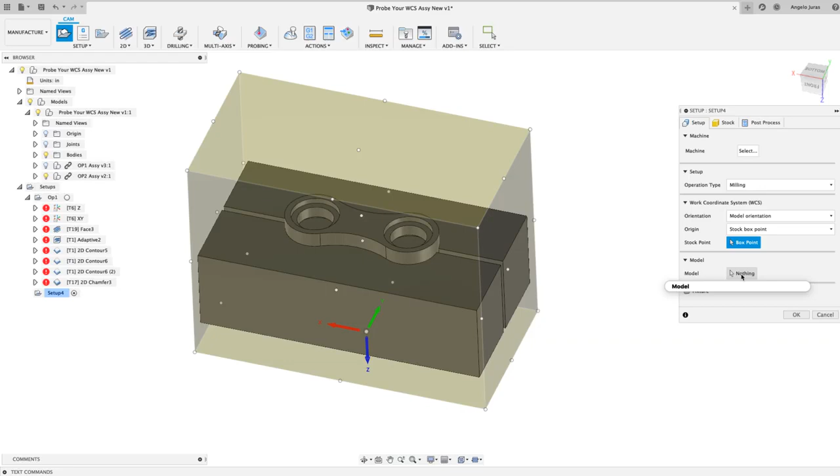All right guys, so now we need to define our op2 setup. That's over here - click setup, and again Fusion detects all of those bodies and creates stock around it. One way to get around that really quick is just come into here under model and say that's what I'm cutting.

And then here for stock, like we did in op 1, I'm going to do from solid and come into here in our browser and find that mesh body. So there's our stock. So now what we need to do is our orientation of our WCS.

Our Z is here, and then X will be here. And then you can do stock box point, model box point - I'm just going to leave it where it is for now. And again, our body was there.

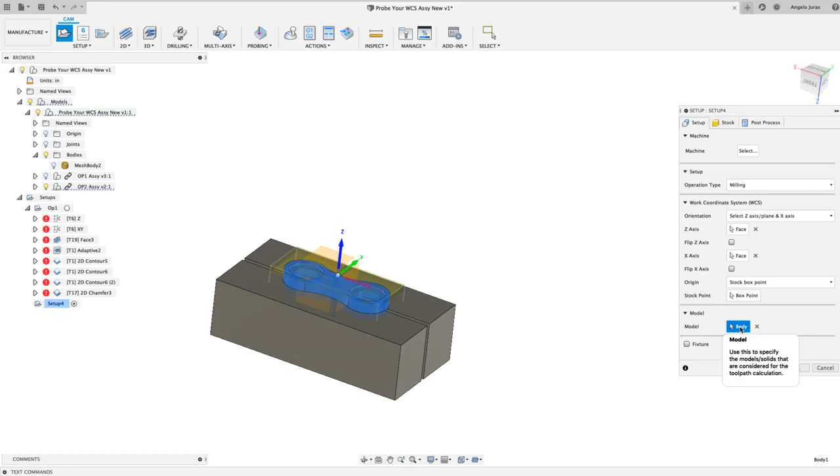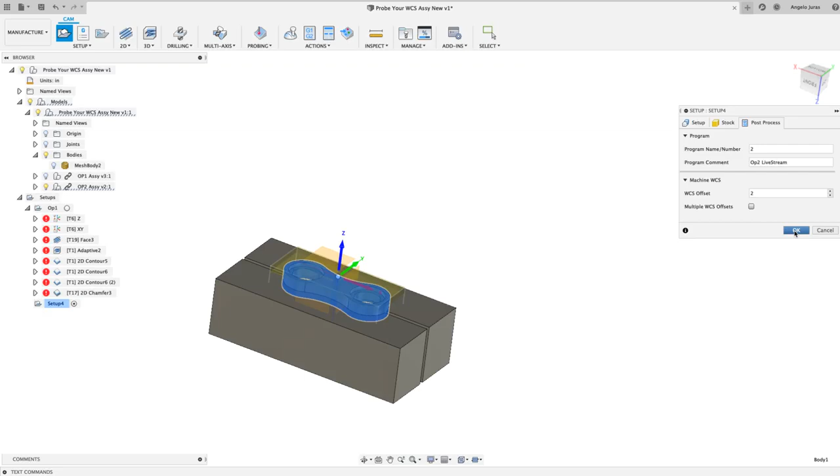Under post process, we can give it a program number, and we can give it a comment, op2 live stream. This could be G54 again if we're doing it on the same machine, or you can do G55. It's number 2. So now we've got our setup with our stock defined and the WCS defined.

Again, I could have picked something down here, but we're going to be probing the part anyway. So I'm going to do a facing operation just to get that top material. I could do an adaptive to clear around that top ledge of material, but in this case I'm not going to worry about it. Come into here, and remember we had that 3-inch diameter face mill.

I'll hit OK there, and then Fusion determines the outer boundary of the stock that we defined in the setup. Under heights, it starts at the stock top and goes to the model top, which is correct. By default that all works perfectly.

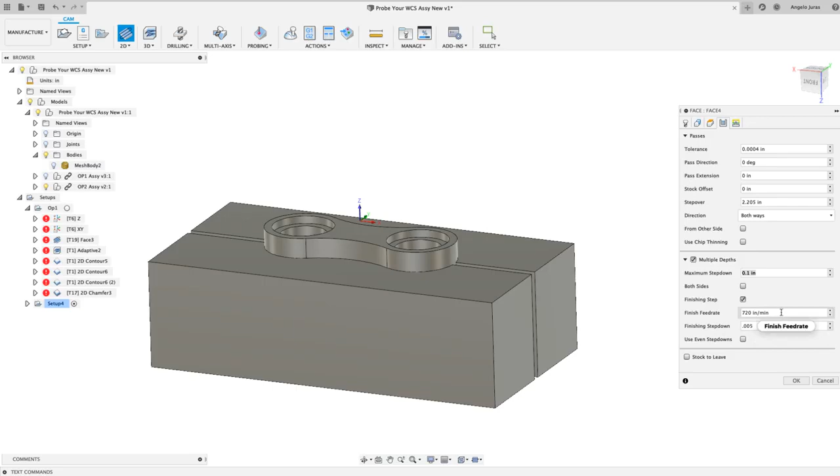Under passes, I'm going to give it multiple depths - that looks good. Maximum step down, 100 thou, and then finishing step, 20 thou. Let's do something smaller, 5 thousandths. And then the finishing feed rate, you can also adjust that here.

So now we can simulate this and see what that looks like. I could right click here and simulate, and I can play that. So see, we're removing that material. That looks awesome.

Okay, so then now when we did that, we've exposed that hole. So now what we can do, we can come here under setup and we could probe. Fusion remembers our probe from when we selected it earlier. Under geometry, what are you going to measure? I'm just going to probe this surface.

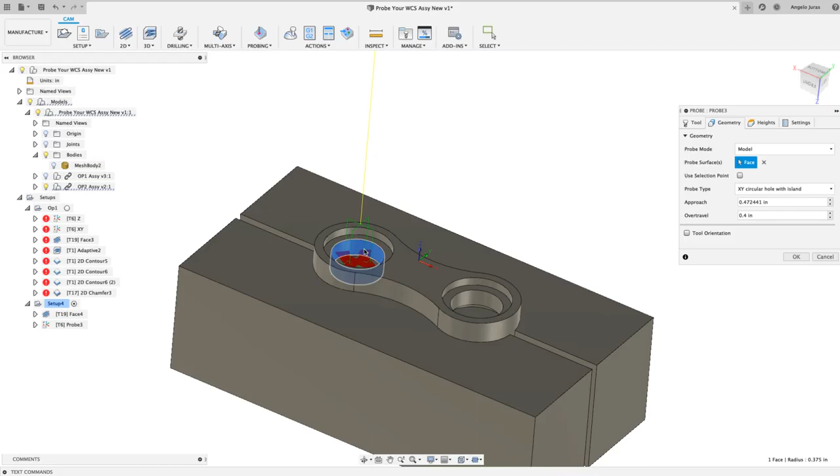And it automatically determines the probe type, XY circular hole with an island. There's no island in the middle of that hole that the probe needs to clear. So I'm going to hit just a circular bore.

The approach, we can make that smaller. Heights, I'll leave it as default - it's basically the radius of the stylus, 3 millimeters beyond the top of that edge.

Settings you can override if you needed to, but I do want to set my G55 to be updated. The reason, again, why I'm doing this, like I said earlier at the top of the hour when we started the live stream - if you have a feature machined in one operation and then you flip it over, you want this to be referenced and perfect, or in the case of the part we have on screen now, we want it to be all concentric, so the bore on the top and the bore on the bottom are concentric. That's why we're probing this.

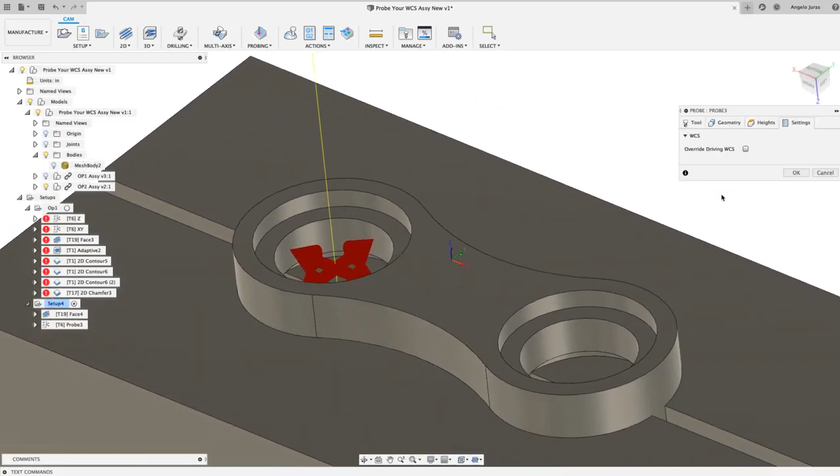So we probe that feature there and hit OK. Now, if I right click and simulate, we'll machine the face of the stock. It's going to expose that hole. The probe will go down inside and measure the bore.

And again, I've got these collisions, Fusion's detecting that my tool, which is my spindle probe, made contact with the part. So anytime that happens, you get these collisions. So don't worry about that notification. That is expected behavior in this case.

So you remember we did these bores on the first op. It was that and that. So I can simply just right click. I could copy that and I could paste it into this setup here. And let me name this setup while I'm here. Let's go op 2, operation 2.

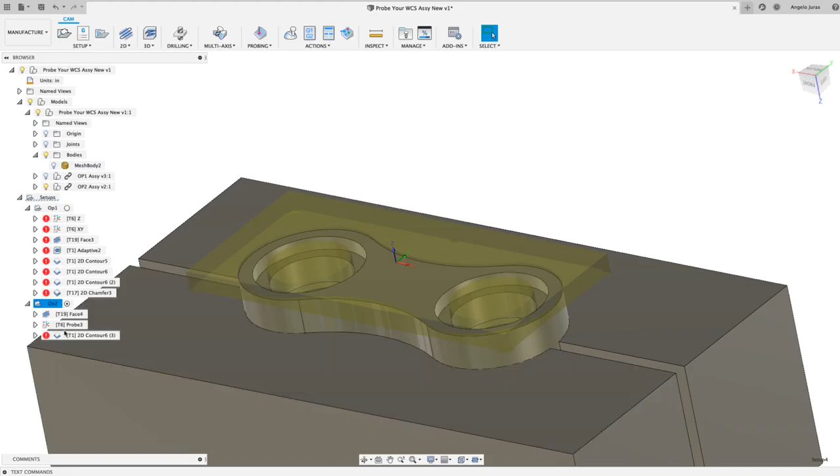So here I'll go into edit and I'll select new geometry and then my heights. Those are all good. I'll leave everything as is. And under model bottom, actually I don't need to hit that bore. I selected the wrong geometry. I'm going to do selected contour and come back to here. Because that bore, if you remember, that's already done from the opposite side. I just need to focus on this counterbore here. That and that. And hit OK.

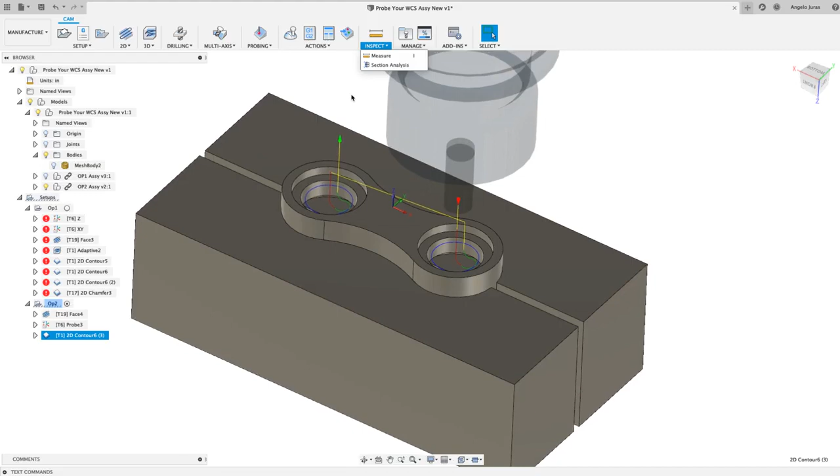So now the tool will enter and machine that counterbore after probing, so we know it's all in line. I was going to turn component coloring back on so you can see it, but then I'd have to jump back over to the design workspace. I'll leave it as is. And then, so there's that.

Next thing we need to do is just chamfer the edges. So I'm going to copy the one from the previous operation. I'll do a copy and then paste. And that's down here now. And I will reselect edges here. Quite simple. Click the outer edge, these edges here, and get in there nicely. There we go. We're running out of time here, but we're just about done.

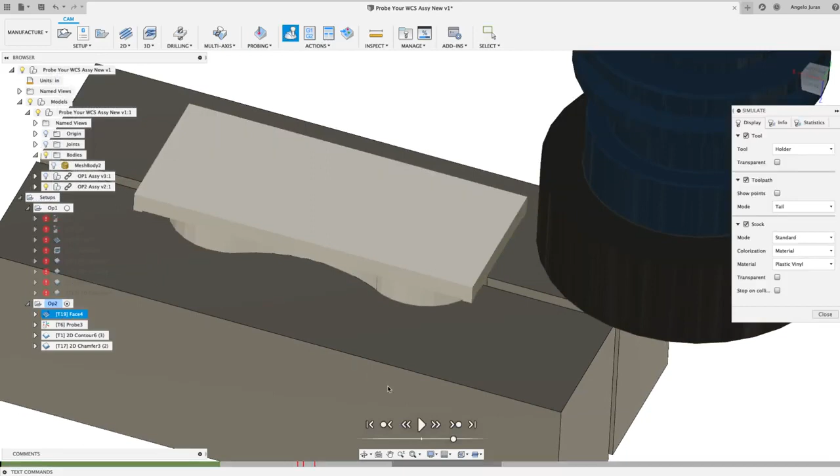So now we can simulate this again with the edges. Let me hide the part. There we go. Face it, expose the hole, probe that bore, update the offset, machine those counterbores, chamfer and deburr the edges, and obviously we would post, but we're running out of time here.

So that's pretty much what I wanted to cover today, guys. Just show you a little workflow on one method to use setup probing in your setup. We'll be doing more here with probe geometry, and then maybe somewhere down the road some of these import results over here. But that's about all I have for today.